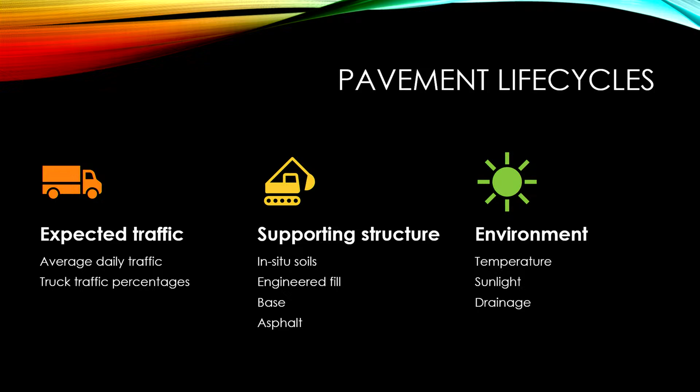And then the asphalt as well. And so we play with the thickness of those layers depending on the traffic that we expect, the truck percentage that we expect, to get the streets around town.

We're going to have a few examples. This is typically not a linear decline, it's kind of exponential for the most part. And so as things start to decline, that opens up the possibility for further deterioration in the pavement. And so as we get further outside without any sort of maintenance to curtail that degradation, then we begin looking at our streets declining too quickly.

So here we have, just for your consideration, an example of a few different streets, and you'll see Street 1 carried throughout these next couple slides. We're using that as essentially a good example of street deterioration if we weren't going to touch it in any way. Did you have a question?

I'm sorry, I do, thank you. Just trying to understand how streets are made. So the Class 7 base is first, and then the asphalt's on top. Is there anything in between?

Not in between. So you have your existing soils that you dig down to, and typically we'll call a geotechnical engineer out on site to view those existing soils and make sure that they're somewhat firm to build up from. Then we have red dirt, that engineered select fill, which varies pretty wildly depending on that in-place soil. That can be anywhere from 8 to 12 inches to 6 feet, depending on the structure they need to make up for their design assumptions based off of the soil that's there. And then you have that Class 7 base on top of the engineered fill, and then the asphalt.

So we'll use an example. Street 1 is kind of an untouched decline, something we're not concerned with. Streets 2 and 3 are declining at different rates, and this is going to be pretty common throughout town. Even sections of streets will deteriorate at different rates.

A good example would be Cheri Whitlock, just west of Mount Olive. If you drive through there, you'll see the crack sealing and everything that's had to be done because of the added traffic that the intermediate school puts on just that isolated portion of street. So that 500 feet, call it, is in much worse shape than the rest of Cheri Whitlock as you go west all the way to Dogwood Street. So even within streets, just from block to block, these can deteriorate at different rates.

So we have our ideal Street 1, and then Street 2, let's pretend we notice it starting to decline, or we have a built-in surface treatment option. Here in yellow is basically Street 2, but with a surface treatment. In reality, we should be treating our streets in some way, whether that's a rejuvenation, a fog seal, a chip seal, or a mill and overlay. We should probably be touching our streets about every 7 years with some sort of improvement to make sure we're prolonging the life of that pavement.

So you can see here if we pretend we've treated that perhaps multiple times as it's declining, we've slowed down that decline from what was a pretty severe decline in this example. We also have the overlay option, which typically won't bring a street quite to new condition. It's not going to be the same as a rebuild in any way. But as you look at overlays, you're bringing that back up from kind of a fair or beginning-to-be-considered-critical state back up to a good usable condition.

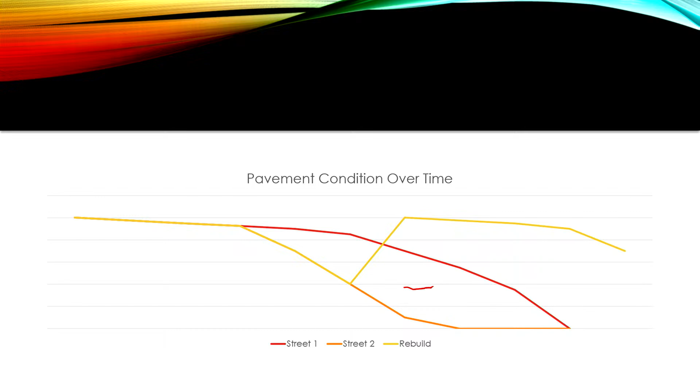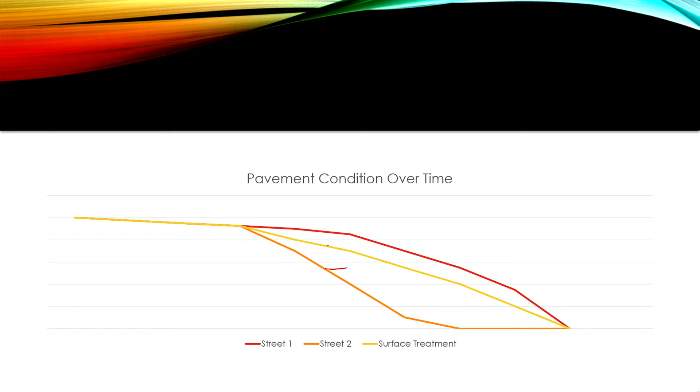A full rebuild would bring a street back to essentially new condition. You can see the spread in cost based on the improvement you're making. If we're trying to bring a pavement up from critical condition all the way back to excellent brand new condition, that's going to cost a lot more than treating it earlier as it's declining.

What exactly is an overlay? An overlay is a full new layer of asphalt, typically 1.5 or 2 inches. You would overlay if the structure is still in good shape, meaning the road is supported properly, but you're beginning to see surface defects affecting the user's experience. The street itself is in good shape, and you're putting a full new layer of asphalt there.

Then there's mill and overlay, which is typically done so you're not overlaying into the curb and reducing its stormwater capacity. Also for tie-ins at intersections, you'll mill out that area so you have a clean seam where you're joining back up. But if you were to just overlay repeatedly, you'd gradually see the pitch of the road increase as layers go down. So after overlaying a street several times, you'll either remove all the old pavement or begin milling the center lines so you're not increasing the pitch anymore.

You can expect about 15 years of life out of an overlay, as long as the structure is there and you're just putting more material on top rather than tearing up the current layer. For a mill, you till up that top layer of asphalt and then put a new layer down. Oftentimes, especially when doing it internally, we'll mill and overlay because at that point it's down to staff time for the milling rather than contracted cost.

As an example of what an improvement plan might look like: if Street 1 and Street 2 are never touched versus Street 2 with a maintenance plan, we slow the decline with surface treatments. Once it reaches a point that it's no longer acceptable, we overlay, and as it declines again, we either mill and overlay to replace some of that layer, or do a full rebuild depending on the needs of that area.

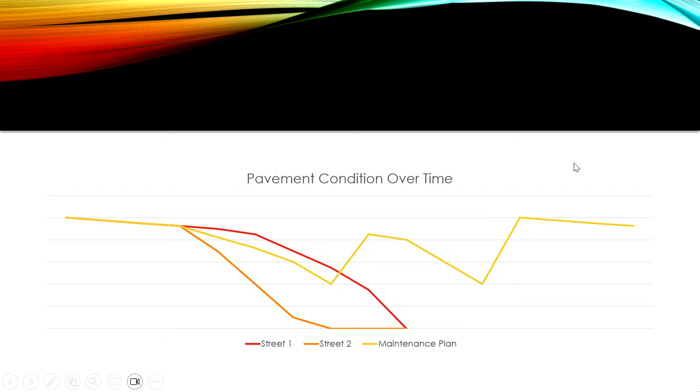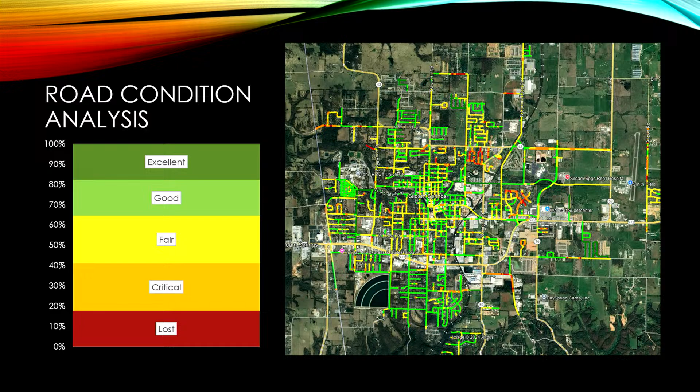Typically the streets in more fair and critical condition have more than just a surface defect. If a street shows surface defects you can hear while driving, but it still shows up as good, that tells you the structure is still adequate. That would be a good street for a surface treatment rather than pulling material out and replacing old material.

That is from 2021, the most recent version we have. Along with the line work, they marked surface defects as low, medium, and high based on severity and driving comfort. That doesn't necessarily mean the structure is failing, just that there's a defect there. If it's not maintained properly through crack sealing and other things, it could deteriorate further and affect the structure of the street.

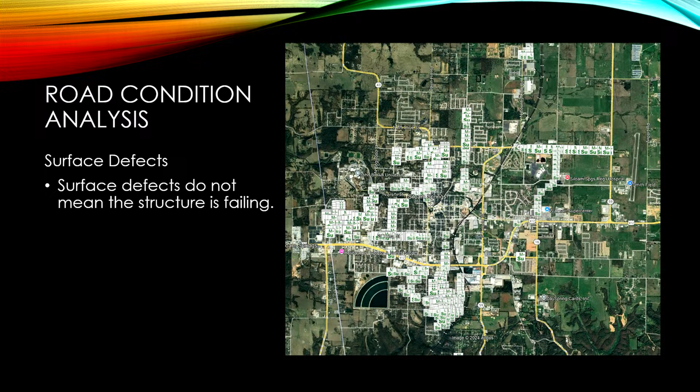Hey Kevin, do we have anything set up to do this process again, since we were around 16 to 21? It seems like we've been doing it every 4 or 5 years. Yes, I'd like to do it every 3 to 5 years, and I believe I'm proposing that in 2026 for an update. The most recent cost I saw was about $95 a mile, so we'd be looking at $12,000 or so plus add-ons. I haven't actually quoted it, but that was the estimate from that company.

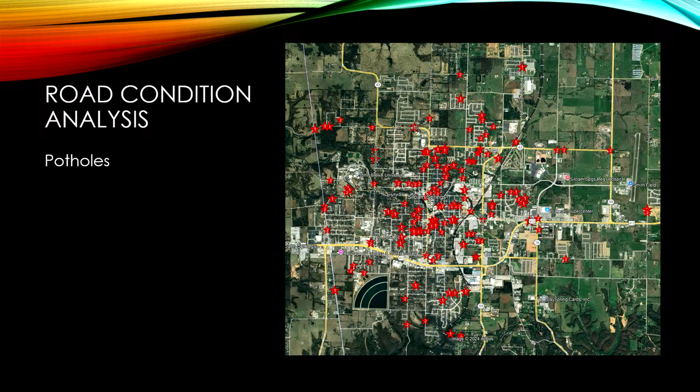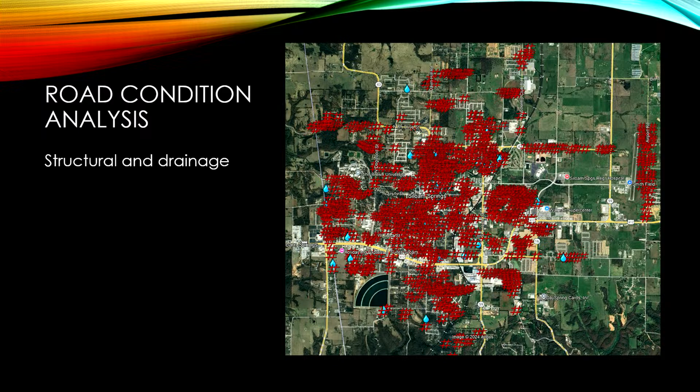They also provide potholes at the time. Ideally, all these should have been fixed by now since we've had several years to look over these. Structural and drainage issues identified in the pavement - this is more what is affecting that condition analysis. The structural defects, more than the surface defects, are what's leading to a larger decline in those areas. They can also look at concrete slabs and identify corner breaks, half slab breaks, quarter slab, full slab, things like that. We'll zoom in on a section of this in a moment.

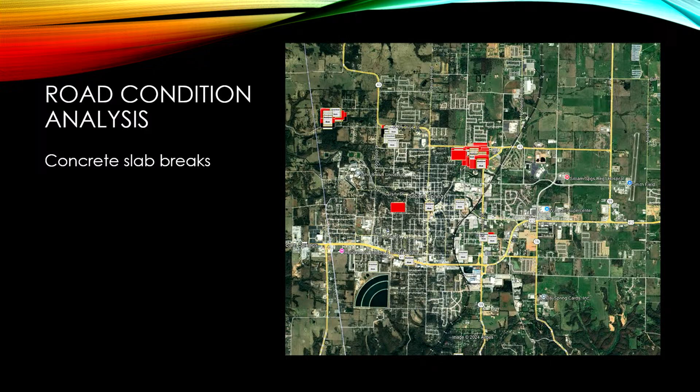When citizens drive by and see a crew do that, it just looks like a really poor attempt at fixing a pothole. I love Dennis, don't get me wrong, but I feel like on certain areas of town where they know there's high visibility and high traffic, the pothole maintenance needs to be - we cut it out, we square it off. My observation is I don't think we're doing that extra work that potholes require. I know by the red dots they're numerous, but it is being noticed by the public, and our pressure now, and I fully accept it, is we're not meeting public expectation. This is the basic - this is like washing the car, this is what the public notices. The pothole maintenance is not done at 100% effort.

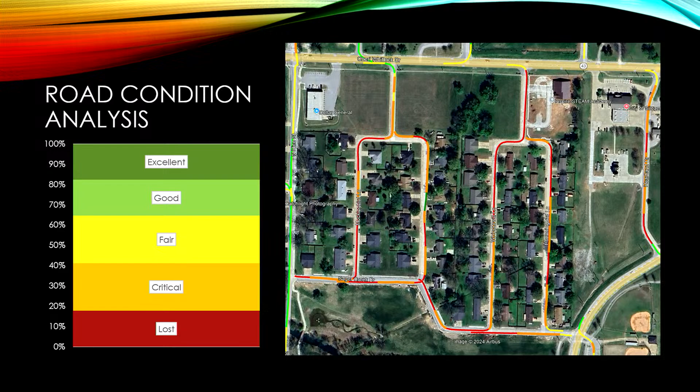The only real problem is the center of the street, and that's what Brad was referring to. We can fill in a pothole, and Alan was saying the same thing, but 6 months later the pothole's back. I've seen it over and over, or it sits there open and getting bigger for 6 months with nobody doing anything. It's not the sides of the street, it's literally the center where the paving joins together. I hate to see us put a bunch of money into redoing an entire street if there's any way to just fix the middle. There may not be a way to only fix the middle, but that's where all the potholes are, right down the center.

It's used a lot more than people realize. Without having inspected that area, I'd assume there's probably a larger structural issue with the street itself, leading to that breaking in the middle, with the larger equipment coming out of that fire station. I think that's the degradation we're seeing in that area, and why it's not up and down like in the tire path, but on that center line with the turning movement. I just wanted to make you aware, I go down it a lot and it seems to only be in the middle. It's weird. Okay, thank you.

You'll see here in that same area at the far east of this slide, they show several major structural issues. That's the triple pound sign there for major structural issues on Heartland Drive.

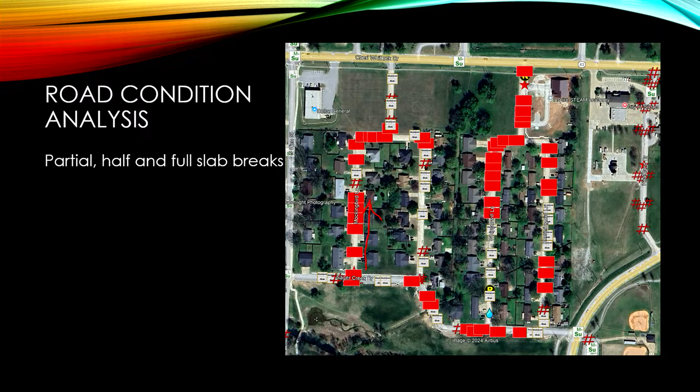What we wanted to avoid was having excavation on Mockingbird and then sit for 330 days while they work their way down to 4th Street. Our thought is we're not having a complete construction site in that entire area. It's a little more expensive, but we think it's going to be a lot better on the citizens and the homeowners and the people passing through there to do one street at a time, move on. We're just not having one big construction site.

Since it's really two developments with two streets in each, you can have one street being done and the people can use the other undeveloped street to get back and forth. They'll close the south end and detour traffic through the one they're not working on. The only ones that should be hindered are the ones on the street that's actually being developed, for as short a time as possible. I think it was Mindy who was quoted in the paper as lessons learned.

So that's a good lesson right there, what you're describing, of what you can do better. And just so the board knows, liquidated damages now are $500 - they've doubled from where they were. Who in effect decides that, Alan? Is it the board? Is it the state?

It came to me and I went for attorney review, because it's we can't call it fines, it's got to be liquidated damages, so it's what we can defend. Am I saying that correctly, Kevin? Yes, that was the number we landed on that Jay was comfortable defending if it were to go to litigation. I would love to say damage to the city is $1,000 per day, but it's what we can defend, inconvenience to the citizens, et cetera. Thank you, Kevin.

So we kind of went over the road condition analysis, and we'd like to update that every 3 to 5 years. Perpetually, what we'll be doing is called the Pavement Condition Index - this is actually an ASTM standard for evaluating pavements. They set additional categories - they don't have an excellent, but they go from good all the way down to failed, with recommended maintenance based off of where you're at in the process.

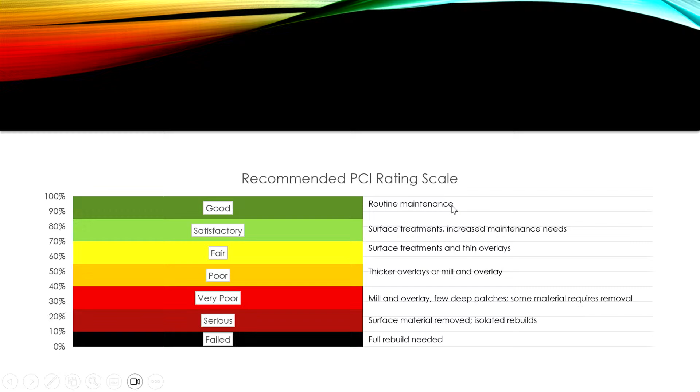Routine maintenance and surface treatments, and as you work your way down, you're looking at thin overlays, maybe things like chip seals, micropave, and then get into thicker overlays or mill and overlay where you're actually having to remove material before you replace it, and then all the way down to isolated and full rebuilds as streets decline.

They start that process with a ride quality test, where the inspector would drive the section of street being evaluated and assign a low, medium, and high depending on the impact to the driver. Then they have 19 different distresses that they evaluate in that system for asphalt pavements, and another 19 for concrete pavements.

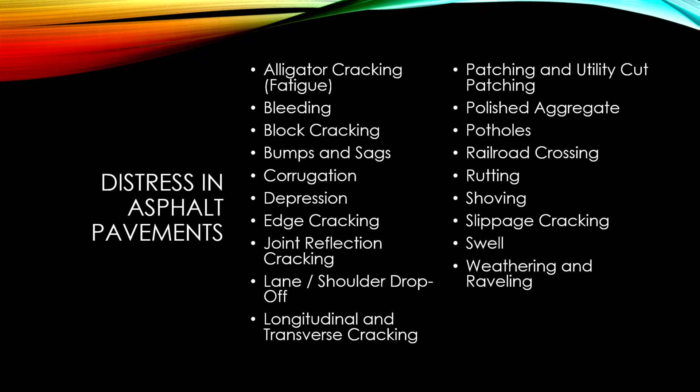The benefit to this is that the PCI system is really good at analyzing the effect that multiple types of failure have on a section of pavement, rather than just assigning it as a pothole or whatever else. So actually sitting there and asking, is this rutting? Is this weathering? Is this edge cracking? Is this something else leading to the issues ultimately felt by drivers?

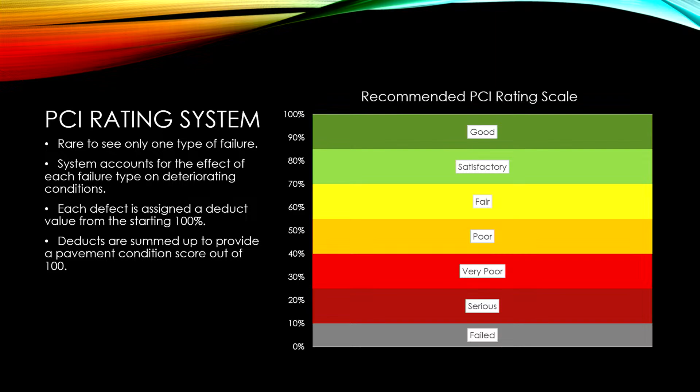Recognizing that these causes make the street deteriorate at different rates, some issues like alligator cracking and block cracking aren't the same and don't affect the street the same way. So each defect is assigned a deduct value from 100%. Things like potholes are major defects which will essentially fail that section of street on their own. And even when you fix a pothole with a patch, that's a lesser defect, but it's still tracked as a defect in that area.

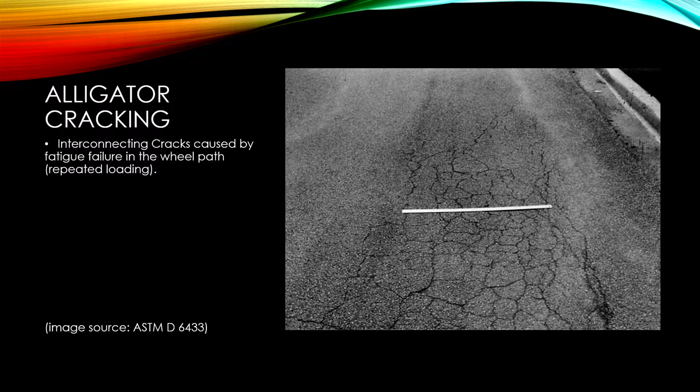Just to hit a few: alligator cracking is typically in the wheel path, and this is a loading issue with the street - a load failure. Block cracking is usually larger pieces, and that's actually a weathering and temperature cycling issue. So again, it's about having somebody capable of identifying, is this a weather issue? Is this a drainage issue? Is this a loading issue? And drilling into whether it's a design assumption that was wrong - like more traffic or truck traffic than expected when the street was designed - or if it's just not been maintained and allowed to deteriorate.

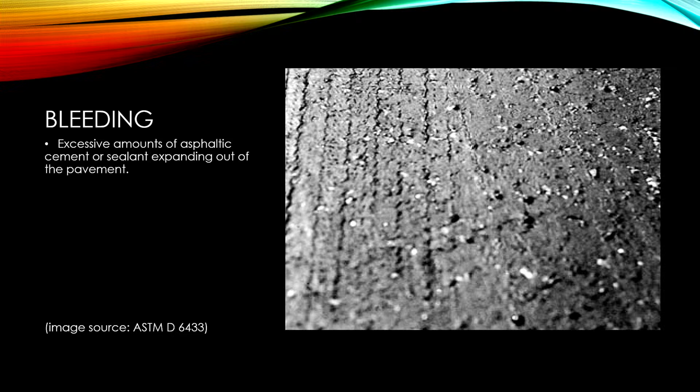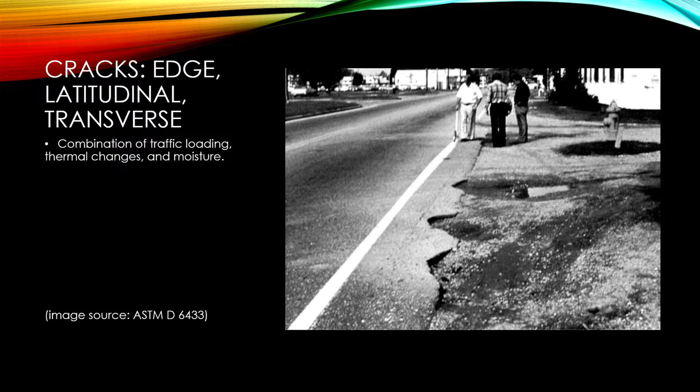Bleeding is when some of that asphalt and bituminous mixture actually comes up out of the pavement in the summer as it expands. This isn't something I've noticed as an issue yet, but it's something that'll have to be tracked as our surface treatment program expands. Different types of cracking, whether longitudinal or edge cracking, particularly as we get streets at that minimum width with no curb and gutter, as the edge falls away - tracking that deterioration.

Kevin? Yes. I might have missed it - Brad was talking about the potholes, cutting out and all that. Is that the way they should be done to last, or is just dumping asphalt and tamping it down the best way to do it? Are potholes filled that way never going to last?

Cold mix has its use, but it's not intended to be a permanent fix. So cold mix should be temporary to hold you over until you're fixing a larger portion of the street, properly blocking out the area that needs to be replaced and squaring it up. RDOT has a good detail for patches on state highways that calls for a certain distance out from the edge of the pothole to be cut down to base, then examine the base to determine if you need to cut out more before paving and closing it up. Part of that is this PCI system trying to identify the actual issue that created the pothole rather than just filling it in and ignoring it.

So since it takes a long time because they're expensive to get to all the streets, why don't we do it more like RDOT does it than just the cold press pack, whatever you called it? Sorry. That's just a discussion we'll have to have internally, because I don't know where we draw the line between cold patch and full patch. But that's a conversation I need to have.

So for patching, like I mentioned when discussing potholes, even once a pothole is repaired, it will still be tracked as a defect as a patch. It will just have less of an impact on the PCI score.

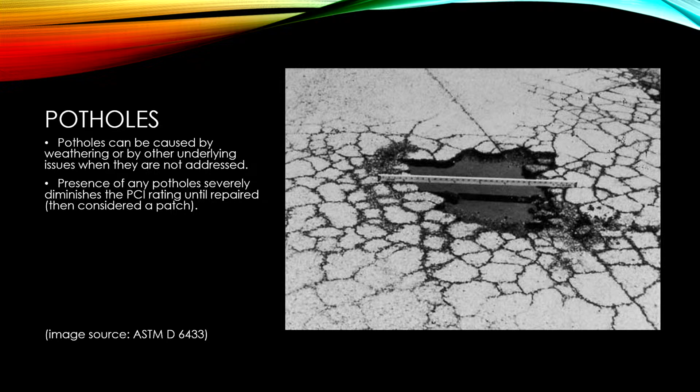And then, of course, potholes themselves, we all know what potholes look like, and we evaluate based off of size and depth in that PCI method. Pretty much any pothole presence on a section of street will fail that portion of street until it is repaired.

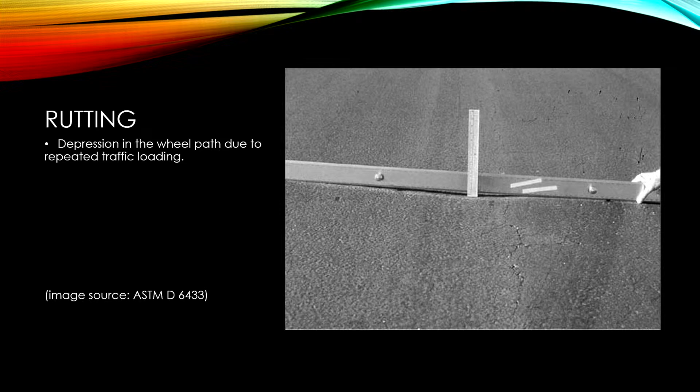And then rutting, oftentimes this kind of goes alongside alligator cracking, though not always. So actually measuring the depth of the rut and then the length as well, if we have a full street section that's rutting, or if it's just at like stop signs, things like that.

What I'd like to propose is a mixed evaluation system. We have about 125 miles of street, so to do a true PCI scoring rating system of all that street is not something we can implement quickly.

Having that road condition analysis done for our entire network every 3 to 5 years, and then if we have major defects like potholes on streets that aren't on our 3-year plan, getting out and assessing those with the PCI score. And particularly if we have a major defect on something that's excellent or good on that road condition analysis, then going at least a block, probably a quarter mile in each direction to assess the street, to figure out what's going on in that location - why is this either an isolated problem or is this section of street declining faster than we expected?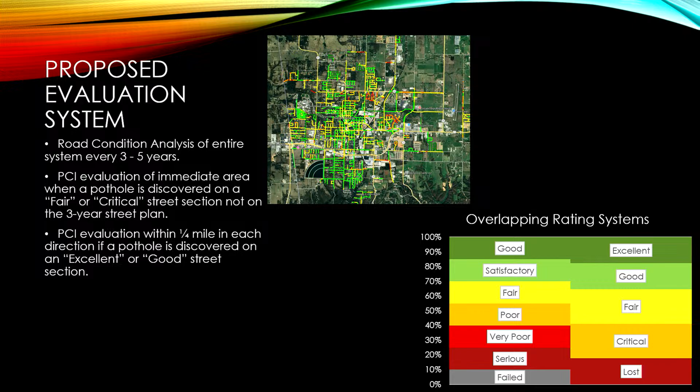And moving forward, tracking that change over time so that we can be prepared for major projects before they're needed. Not all streets and not all sections of streets are going to decline at the same rate, so evaluating that cost to repair and maintain against the amount of traffic a street receives, and sorting our system, we need to find a balance between local residential streets and thoroughfares like collector streets, major locals, things like that, and get that balance for our maintenance plan as well as our improvements plan moving forward.

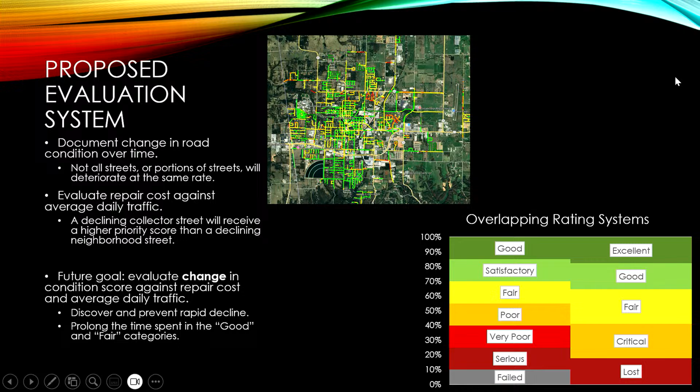Our goal for the maintenance plan is not to increase the capacity of the street, but to prolong and bring back up to good condition the street's usable state, the time spent in a usable condition. So we want our streets in that excellent, good, and fair condition.

And as it's declining into critical, we want to plan for that, whether that's a small micropave overlay, or if it needs a surface treatment to get friction back or handle the water, or if it needs a mill and overlay - planning for those things as they come up before their critical needs.

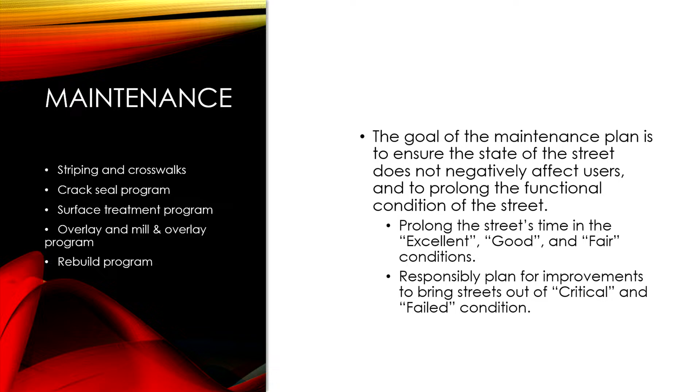And then with our improvement plans, things like implementing safety countermeasures, curb and gutter, storm improvements, pedestrian improvements - those major widenings that affect the capacity of the street and the options for road users in an area as well.

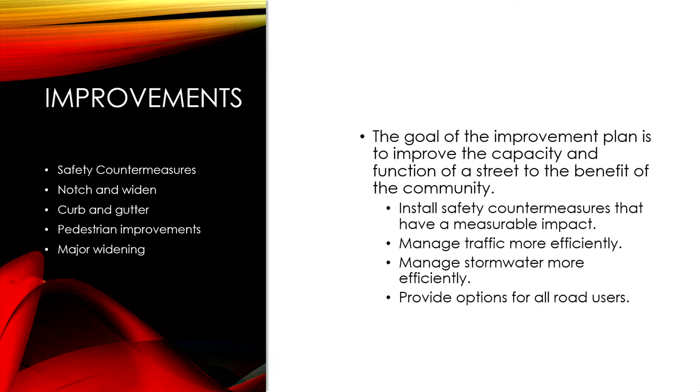Part of what we'll be looking for guidance from you as a board is what is considered a fair street, so something to be thinking about moving forward into this next budget cycle. If you can find streets that are borderline as you're driving, and tell me this section is as bad as I'd like to see, then we can start associating real costs to that. It's a subjective measurement when we're talking about ride quality. That's part of why we're trying to get into the PCI system for a more data-driven option. But until we have that ready citywide, we'll go more based off road condition analysis and what you as a board would like to see improvements on, what's an adequately fair street that's not negatively impacting users, and our improvement plans moving forward.

One thing we need to consider is our master street plan width, which has some revisions coming up in the unified development code to change some widths and provide multiple options if it's close to a school or park, for additional pedestrian options. This will also affect widening projects if we're looking to purchase right-of-way rather than use existing right-of-way, which brings up the eminent domain discussion more often if that's the route we'd like to go. On the plus side, that gets us the street that's planned for the future at the time of the project. If you look at Hyco and Tahlequah, those streets are wider than they necessarily need to be today, but they're prepared for future development whenever that comes.

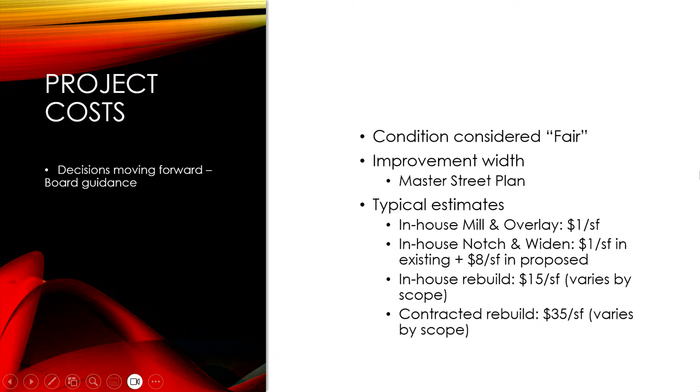For an example -- again, this is all pre-design, pre-right-of-way acquisition -- a 37-foot collector street rebuild of Dawn Hill from Mount Olive to Oakcrest would be about a $5.5 million bid in today's dollars, or in-house closer to 2.7. It doesn't look like much difference going from 37 to 28 feet, but that would lower your right-of-way cost, which isn't represented in these estimates. You'd be looking at closer to 2.3, 2.25 for an in-house widening, with sidewalk on one side of the street. Notch and widening, which would get that existing 18 feet to 22 feet, adding 2 feet to either side and moving culverts and relining ditches, would be closer to $215,000.

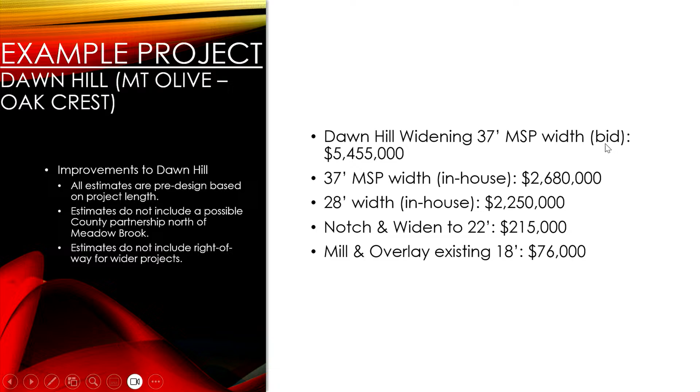The downside, particularly in this location, is that the Commons and Heritage Ranch have just widened to our master street plan width of 37 feet, so a notch and widening is no longer as viable a solution in that area. Mill and overlay would cover about 76,000 square feet of pavement to go all the way to Oak Crest.

Hey Kevin, before you move on, go back to project cost -- so you're looking at $15 a square foot in-house, and a subcontractor's $35.

One of the hangups we had with city staff is that we work Monday through Friday. Let's say Monday through Wednesday it rains, and then you have a good 5-day period, and the subcontractor is supposed to chase weather, knock on wood, so that means they work through the weekend or whatever. That was one of the delays dealing with city employees.

Is there a way, if we were to start doing some bigger projects again in-house, can we put in these real numbers? Like, can we have employees work on a Saturday and Sunday at time and a half?

And if you would, give them a quick update on East Main, the grant, because we're hoping that will get started in September. We're a little behind right now, but that's a total rebuild. So we're gonna have a lot going on with rebuilds in the city, plus all these.

Before you do that, I just want to say on the ones you're talking about, they're in Ravenwood, right? Ravenwood Addition. Correct, yeah. Pickwick is one of the worst. I haven't been out there, so I can't give any idea, except I've heard people talk about it. The only concern I have is when you have streets in a limited driver number housing addition.

And these are only overlays, so they're not that expensive, which is good. Take care of them before. I mean, Alan was talking about Benton Street. Benton Street's been like that for 15 years. It's really kind of almost held up, even though it's a mess. It does need, so I'm glad we're talking about overlaying it before it gets worse.

It definitely needs to be smooth, but as Katie was telling me, she's not sure, and I agree, that Dawn Hill can last till whatever year you've got it on, because of the amount of crumbling on the edges that we have on that. And I was reminded, talking to Lisa, that Elm Street had crumbling on the edges, and we lost a fire truck.

An actual fire truck turned over, didn't it? Something happened. It turned, one side went in the ditch. And once it's turned, yeah, saw it, but it was totaled. And it was all because it ran on that edge and the asphalt crumbled.

And I see that you've got a portion of Glenwood, but just the asphalt portion, because again, it's concrete. So do you see them? I think those are in '26, in our next year's plan. I don't see Orchard Hills or the rest of Glenwood or Greenwood. I don't believe I had those on this list. Do you see them making the list at some point for the same reasons?

Are we talking about a complete redo or just an overlay, what we're doing for the Bird Streets? I think the Bird Streets are in worse condition than those others. I think those others are probably not too far behind - they're ones I hear about with patching up the potholes, and then it just crumbles again. But Orchard Hills, I referred to it as Villa View - it's Villa View neighborhood, but it's Orchard Hills that had the big huge section taken out, and that seems to be holding up. It may be that that's what we have to do at those other streets where we have the bigger potholes that just our temporary repairs aren't working very well.

But they probably need to be on the back burner. Yes, and I am trying to find that balance between the local residential, lowly traveled streets and the larger thoroughfares that are going to have more bang for the buck as far as the number of users affected. Yeah, and I don't know that I've found that balance with these proposed streets. But the ones that I'm seeing are so far gone that they have to be addressed, like Pickwick - that's really some of my point, these others, yes. Bird Streets, absolutely, even if they aren't as well-traveled. But I imagine they are fairly well-traveled because they're sort of a thoroughfare between Cheri Whitlock and Sager Creek. But as I said, those other two areas of concrete streets, they're in pretty bad shape too.

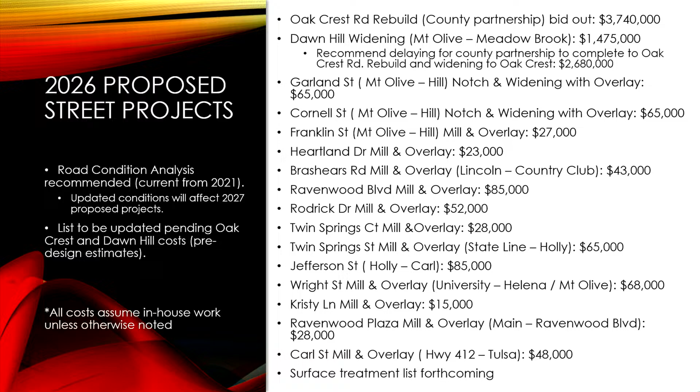The 1475 is 37 feet, but only to Meadowbrook. Where is Meadowbrook? I'm lost. Meadowbrook is south of Lawless, it's got that loop street and then comes back out. That's where city limits stops on both sides of the street, and then city limits follows center line to Oak Crest. So if we partnered with the county, we'd look to go all the way to Oak Crest.

And then during the break, I worked up a quick contractor number for that. For a 28-foot bid out would be about 4.2 million. That's kind of what we... versus what you have on the, it was like 5.6 I think. I'm putting you on the spot - what would you think the time estimate would be on that? I'm just thinking, you know, the board said 'poof, here's the money,' we could get started. But I think that would process 3-4 months, but then the widening - I believe this project would take close to a year.

It'd be, you're probably looking at 7 or 8 months in design, probably 7 months in design. The bridge is kind of the wild card. Call it 7 months in design, and then right-of-way acquisition, depending on the width of the street that we want to build, if that's 37 or 28. And then the actual construction project itself, it's about 4,000 feet, so you're looking at probably 45 weeks.

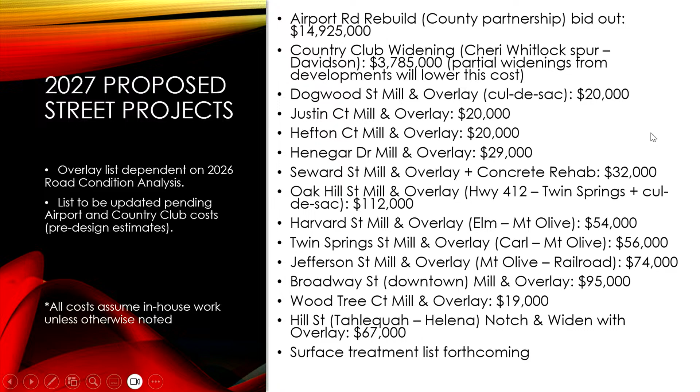And then the other thing I'd like to mention, this 2027 list - I'll be asking for a new road condition analysis in 2026, so that would be adjusting the list that you see here today. How much does something like that cost? On their website, they had it at $95 a mile along the road, so about 12,000 plus whatever add-ons they might have now.

And then a couple things before we wrap up that I want to keep on the back of everybody's mind.

The intersection of Highway 412 and 16, the estimate from ARDOT is about a $3.6 million improvement there to add turning lanes on the south side of that intersection on the Highway 16 side to get to 4 lanes like what we have on the Progress side. Right-of-way, new signals, drainage improvements - that estimate is from ARDOT.

And then Highway 59 and Kenwood Street, they are separately proposing to replace that bridge over Highway 412 and have asked if we would like to partner for the intersection at Kenwood Street. So that $6.5 million, that's their estimate there for pedestrian improvements, right-of-way, the intersection itself. And I don't recall, I think it did have a signal at that intersection in their estimate.

Sorry, I know we're trying to finish up, but that's been a big intersection for accidents, and even though they've done some of the requests that I made, sooner than later would be better. It concerns me that it's just a future need, because it's dangerous.

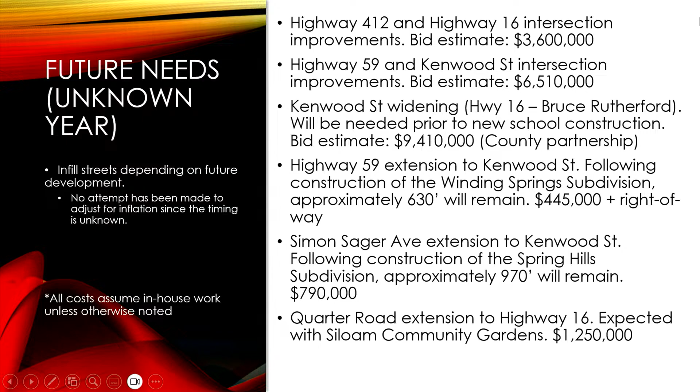And then just wanted to end with - this is the map that you have in front of you showing the street projects over these next 3 years, and I'm available for any questions.

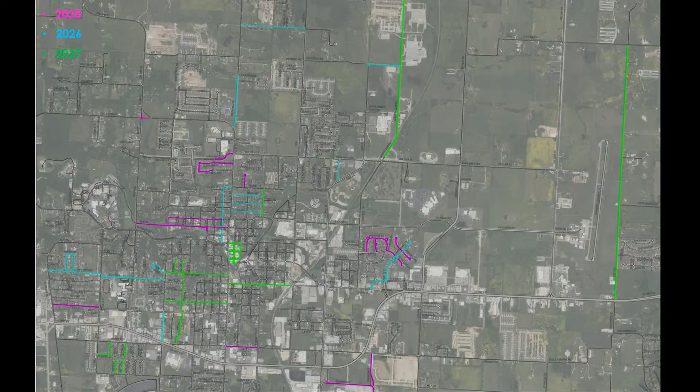Do we know the date of when they plan to break ground on that? I actually had a talk with the superintendent today. We have a meeting on Thursday at 1 o'clock. They're going to tell us about their future plans, because with the annexation you'll see tonight, in the way that's set up, we just want to make sure what we're doing meets what they're doing. So we're going to have a meeting on Thursday, but we've got to be prepared once that's finished for the amount of traffic from parents.

Yes, sir. Okay. Madam Mayor.

So, quick question on the Kenwood, Highway 16 to Bruce Rutherford - what is the proposed width of that street? I know at the intersection, it was wider. I don't recall if it's the full 37. I'd have to go back and look, but they're proposing the street width with a 10-foot side path on that north side.

Thank you. Thank you, Madam Mayor. Kevin, let's just make sure we get these printed for the planning commission members. They've already got them, Director. So good discussion, good presentation, Kevin.